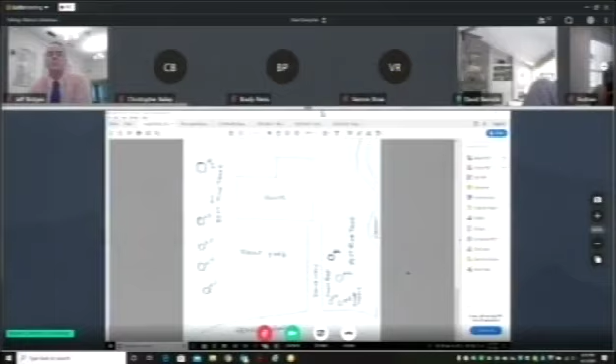So this is a, Jeff, can you share my screen, please? This is a tree removal request for 3 Glenridge Road. Once my screen gets shared, I can go over it. It's approximately... so the property has, oh, here we go. All right, so here you can see just a sketch of the property. We do have a perennial stream on the right-hand side of the property.

They are requesting the removal of 9 trees. A site visit was performed last week; Mr. Halterman and myself went out there. We reviewed the trees and asked for a certified arborist report as indicated in the application. The property owners did have a certified arborist go out and look at these trees. I received a report from him today with a summary. So just so you're aware, on the left-hand side, trees number 1 through 5, and I have some photos I can quickly show you too, are 5 tall pines.

And then on the opposite side, closer to the stream, there are 4 trees, 3 of them being tall pines and 1 being a smaller maple tree.

The arborist did indicate that upon his assessment of the 9 trees at the location, he deemed them to be hazards to public and private health and high risk for failure. The 8 eastern white pines are very tall and fragile with high potential for breakage due to heavy winds, which could cause damage to the telephone wires and poles in the vicinity, as well as to the private homes and other properties.

The 1 maple is very close to the power lines with a potential of high failure due to the excessive lean on the tree. So that's what we received.

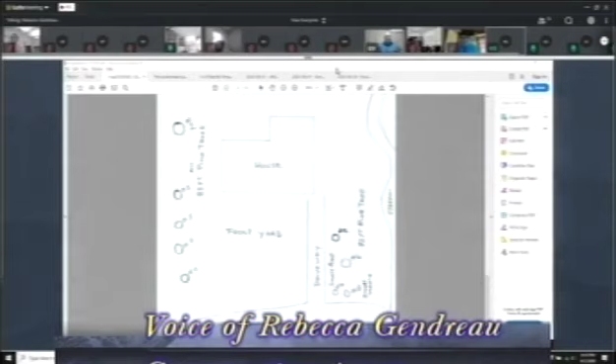I can just quickly show you the photos, and then I can let the property owners add their input here.

So what you're seeing here is the left-hand side of the property, further from the stream, the 5 tall pines here. They are marked. We did see them marked on the site, just marked lower by the base, so you can't see it here.

This is on the right-hand side. Off to the side here is the stream, and then it's the swamp, or red maple I think it is, here. And there's 3 pines in addition, 1, 2, and 3, that they're requesting to remove.

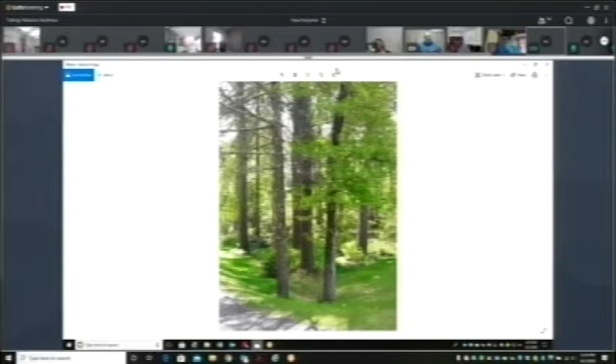Those are about 30 to 35 feet from the resource area, and the pines on the opposite side of the house are approximately 80 feet or so from there.

I would recommend allowing the approval since they did have a certified arborist look at them. There is a safety concern here. There still is a canopy near the stream, so I don't think we're going to have a significant impact with the canopy providing shade on the stream.

It probably would be useful to add some larger shrubs in that area versus requiring replacement trees. I wouldn't really recommend any replacements on the left-hand side of the house. I think the shrubs would be beneficial on the right-hand side near the stream, especially up in the front area near the road, to provide some habitat and some shade over there.

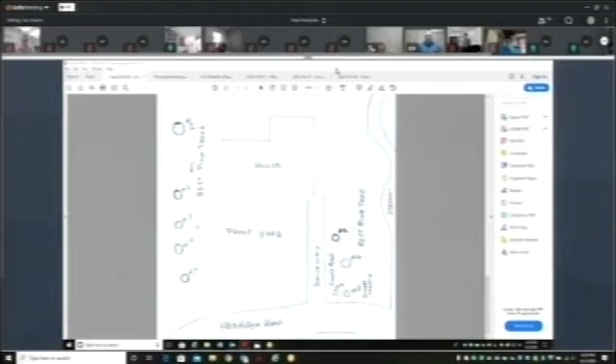39 years we've lived here. We've never seen anything like it. And I don't know how compromised these trees are now because they swung about 25 feet in the air side to side, and that one took the hit big time.

We have another one down there that has a Y. It's been cracked for 25 years, and I really didn't do anything about it because I just kept watching it. But now that we're senior citizens and these things are close to our house, there isn't a tree in this area that isn't less than 25 or 30 feet from our house. So if they fall, they're coming down on our house.

So, Joe, you mentioned your plan is to replant rhododendron? Yes. Would you consider planting some more habitat-friendly species than rhododendron?

Sure, whatever Becky suggests would be fine. Okay, there's plenty of shade there because we are leaving other trees that are there.

There's another series of pine trees there that are a little further away that we're leaving. There's a hickory tree and a butternut tree that's there, and we have 2 more pines that are shading the stream. High pines that I don't think are a threat to us because they're leaning the other way, hopefully.

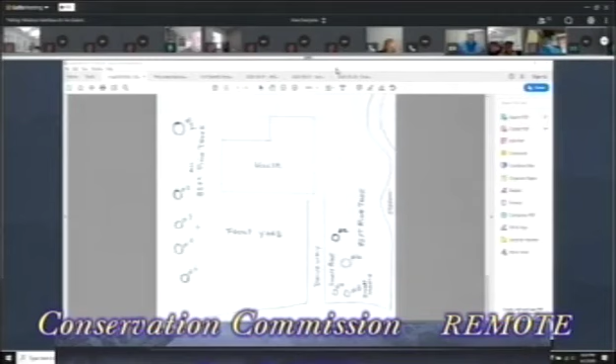All right, you're all set, Joe. Do we need a permit, or are we good? Yes, Joe, I will draft a permit for you, and we will mail and email that to you. Thank you, Rebecca. You're welcome. Are you all set? Yep. Thank you, all right. You guys have a great night. Thank you very much. You're welcome.

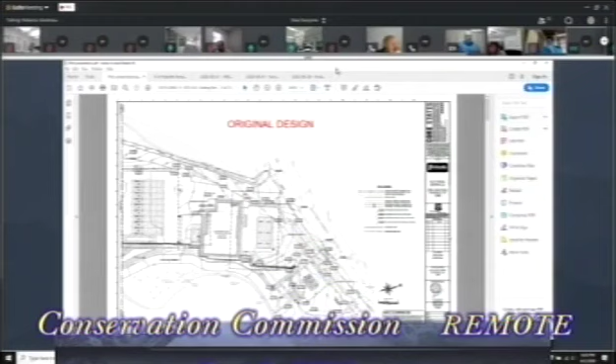Okay. So is the applicant here? All right, yep, we do have the applicant here. Just to provide a quick summary, this is a project continuation. It is accurate that we still don't have a DEP file number for this. Just to refresh your memory too, you did vote to approve having a peer review done for stormwater management on the site. Just so you're aware, that peer review is underway.

We did receive revised project plans last week for the project. They have been provided to the peer reviewer. We don't have our report yet because of the submission of the revised plans. We do anticipate having that hopefully before the next meeting, and we can work through that at that time.

So right now what we're going to do is Brad, the applicant, is on the line. He put together some PDFs just to kind of highlight where the changes in the plan submission are for you. So I'm going to let him go through this time for you, and then I have a few comments afterwards, and I'll say them afterwards.

So go ahead, Brad. Thank you, Rebecca. Is it possible for me to get control so I can use the cursor to point things out? Unless you had it on your screen and you had permission, and then you could use your cursor. I've got it up on my screen. All right, so who am I making presenter? Brad also, the one that's BA up the top. Brad? Yes. Brad Hannis or Brad also? Brad also. Okay, there you go.

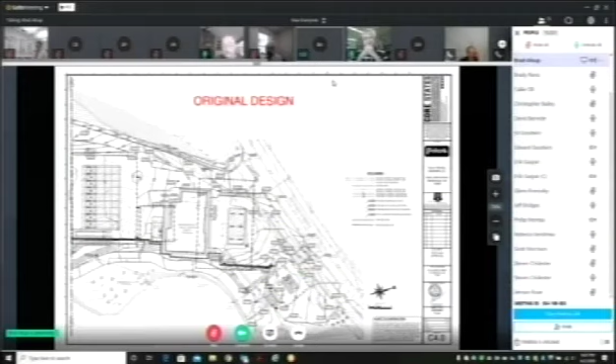Okay, all right. You guys should see what I'm looking at here. So Alan Roscoe, our civil engineer, is also on the line, and he'll jump in on some of the reasoning behind doing some of the changes. Rebecca is right, we do not have a DEP file number yet. I actually corresponded with Denise Child from DEP today.

They're behind based on workload and the difficulties of getting things done remotely in a timely manner. She did tell me they're working as quickly as possible, so hopefully before the next meeting we'll have that file number.

Based on the site visit that the peer reviewer, Alan our engineer, Rebecca, and some board members attended, we resubmitted plans to address the comments that came up at that time. We wanted to be proactive and give everybody something to review based on their comments from the site walkthrough, so that's the reason for the change in plans.

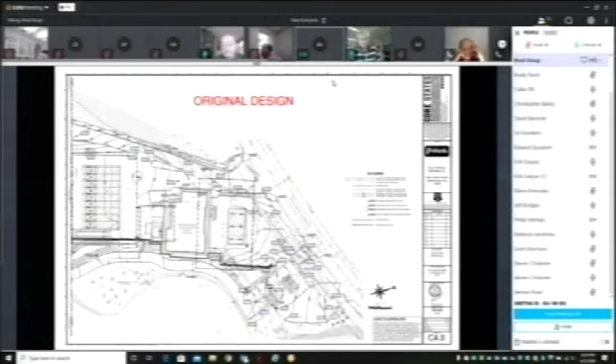What you'll see now is the original design submitted for the first hearing a couple weeks ago that the peer reviewer started with. You'll see we had a small pond here near the Ovide pond, the large one we have setbacks and buffers from. There was a small ponding area in this area, and another further south, both part of our stormwater system.

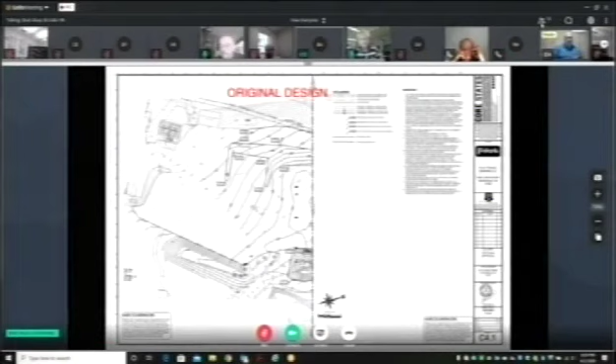Did we lose you, Brad? No, I'm just trying to get it to go back a slide. Oh, okay, all right. Let's see. What happened with the next chapter? All right guys, I apologize. It's tough, Brad, we've been doing this a couple times now, so you know. There we go, take your time.

So here's the revised design. We still have the pond here by the diesel fueling area, which was reconfigured a little but is still in place. The pond that previously filled this entire area has now been made smaller.

On the other side of the drive easement that goes back to the hotel, we've now put a pond between that driveway and the Ovide pond. Alan can chime in as needed, but the reason comes from the next slide showing our drinking water well. We knew there was a 100-foot setback from that, but DEP has come back and said it's actually a 295-foot setback for stormwater infiltration. We had a pond pretty close to that drinking water well, so we had to move that stormwater treatment area to another part of the property, and that's why it was moved to this location.

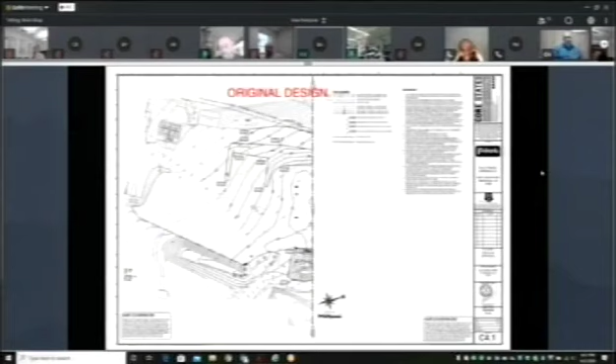Let's see, I'm only going to punch the button once. There we go. So originally, this is the pond I was talking about, this is the water well and water treatment facility. We had a pond in this area to provide some infiltration.

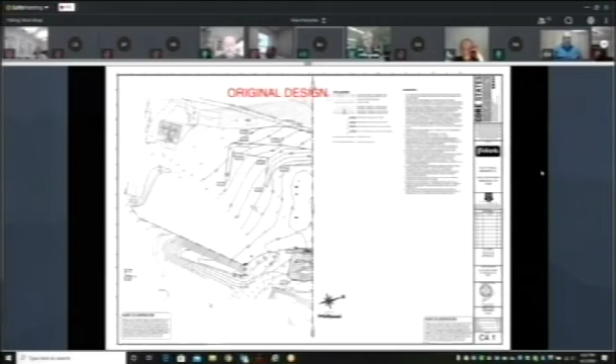This is the area that is currently asphalt that we are going to pull up. If you remember from your site visit, right along this curb line there is a row of large boulders, so we're going to put a curb there. There will have to be a break in the curb so I can still get a truck back to access the water treatment building for salt and such, but we've got a curbed area so trucks can't get back there. We're going to pull up the asphalt, and instead of a pond it will just be a grassy area that matches the existing grade, but it will be pervious surface.

So that's the big changes with the stormwater that resulted from the on-site meeting and the discussions that the peer reviewer, Rebecca, and others had with Alan.

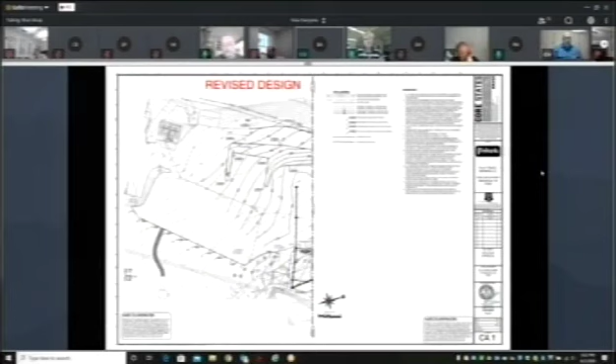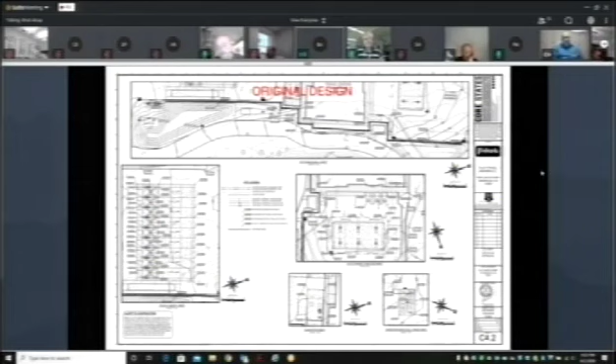These sheets are really just details of the pond that's right beside the diesel fueling area. One other change we made, probably immaterial to the conservation discussion, is we moved the diesel fueling and the truck scale about 5 feet to the west to get them further from the retaining wall, just to help from a structural standpoint.

Oh, where's my meeting though? And again, this is showing the proposed, the revised plan and those details. So the next area I'm going to discuss...

All right, the Wetlands Buffer plan. This was the original design. Alan and Rebecca, I'll defer to you on some of this. There was discussion about whether we were meeting all the buffers and whether we had everything properly delineated. So this was the original Wetland Buffer plan for the northern half of the site.

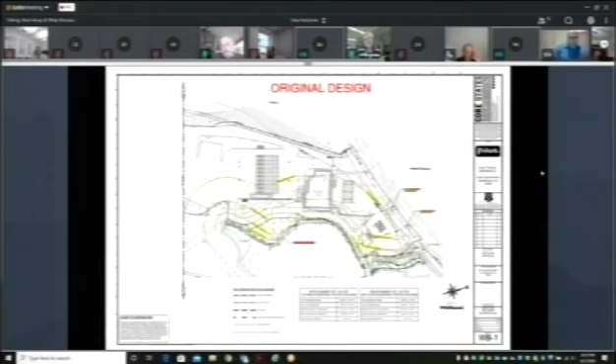The updated version doesn't have color, but it looks like it does have a couple of changes. Alan, you want to comment on that? Well, sure thing, everybody hear me okay?

The change you'll see here is in the southern area of the fire protection pond. Rebecca had noted that the southern area of this pond has riverine characteristics, so she asked if we would look at that, which we did during the site walk, to identify whether it's meeting the requirements to be riverfront.

You'll see it's almost in the figure of a box, which the cursor is going over right now. Where that area of the pond is now entering the culvert area, it does look like more of a riverine quality. So we've added the 100-foot and overall 200-foot riverfront zones to the plan and updated our tabulations.

I just want to note that there's no new areas of impact in the riverfront zone other than parts of the property already disturbed during the original development. So we're maintaining all of the setbacks between 0 to 25, with no new alterations there, even with the shifting of that stormwater basin that Brad just alluded to.

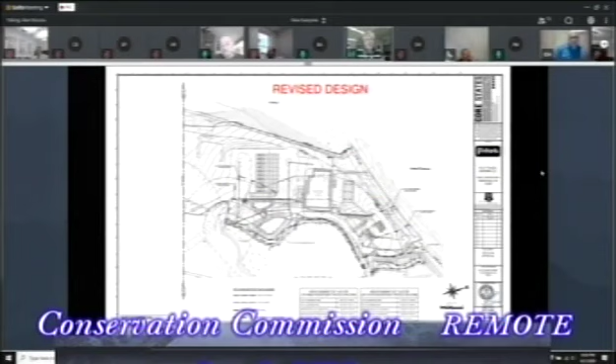Scott Morrison, who we've also invited to participate tonight, provided an order of conditions which we sent over to the Conservation Commission, relating to a cross culvert that cuts across the truck parking area on the southern part of the project site. There was some question as to whether that might be a resource area, but I think we've answered that as well.

All right, thank you, Alan.

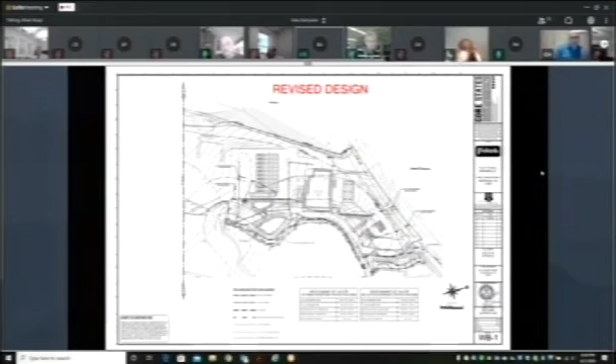The next thing I wanted to talk about is something you all brought up at the last hearing: the amount of trash that gets dumped from this parking area, the far southern part of the truck stop site. Trucks specifically back into these spaces and for whatever reason have decided it's a great place to empty out loads.

So we've had that cleaned up a couple of times. We're trying to stay on top of it. This was the original plan. When I go to this next sheet, there we go.

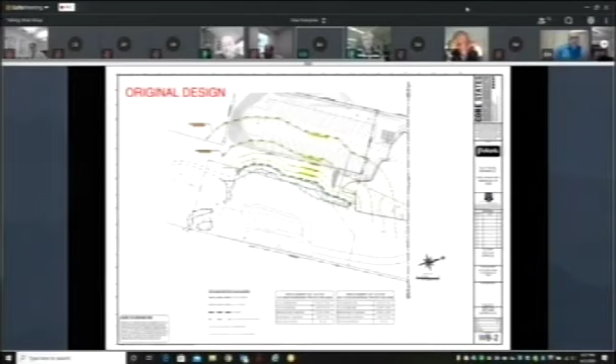It's faint, unfortunately, but we are now showing a 6-foot high chain link fence starting here, going along, and it'll cut over through this area to prevent dumping.

So we would put the 6-foot high chain link fence so the guys can't just back up. I'm still toying with how I'm going to keep them from backing into the fence. My initial thought, and don't hold me to this because I've got to make sure it's going to work, is to actually take all of the boulders that are no longer needed to protect the well.

Since we'll have a curbed area there, we'll set the boulders right in front of the curb. There will still be plenty of maneuvering room for the trucks in the parking area, but we'll have the boulders to keep the trucks off the fence and the fence to prevent dumping. I think that'll make a significant improvement to that situation.

And of course, we will make sure that necessary operation and maintenance procedures are in place to police that area and clean up anything that is thrown over the fence.

One other thing is, I had mentioned last time that we were going to relocate the leaching field for the wastewater treatment plant. These double lines you see where my cursor is, that is the new leaching field with a force main that goes to the wastewater treatment plant, approximately right here.

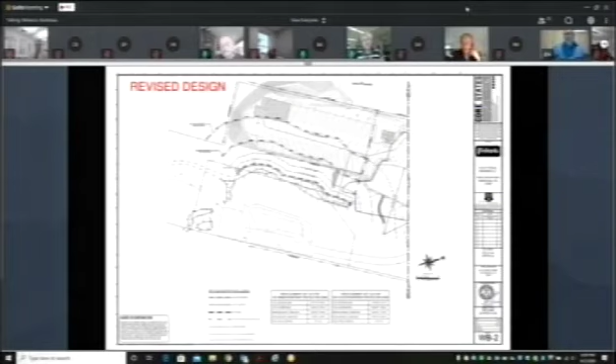You want to start? I just wanted to provide a couple comments. So I just wanted to verify about the wetland delineation. They did revise the riverfront area that I had the question about—it is shown on the plan. And then the other area that was of question is actually shown on this revised design sheet.

Oh, sorry, just took it off. Okay. I can reshare mine if you pop it right, it's still up on my screen. You pop it up, or give me control again, I'll pop it right back. I apologize, guys, you should still have control, Brad. Oh, I do? Yep, let's see. So just share your screen. Well, I'm trying to get—there we go. Screen. And this one. Sure.

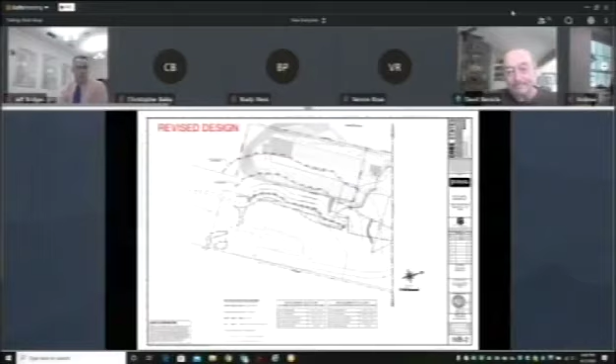There you go, perfect. Is this the one you want?

Yep. So up in the upper portion of the page, you can see there's a swale that comes down with a circle right up there.

So Scott did send a copy of those orders of conditions. I pulled that project out, and that one actually didn't have anything for this portion of the site. It was related to, I think, a dam repair replacement that was done. But we did have another file that I pulled out, another project, and it did have an overall plan that showed this area, with some information showing it's like an 8-foot riprap swale that comes down, feeds into, and shows it as a detention basin with that cross culvert that comes down.

And it does appear, I went back and looked at the aerial photos, that there's no resource areas up there, so it appears that it's just stormwater from Route 84. I think there's also an easement for the Commonwealth there. So I don't see any concerns with that. It does appear to be a stormwater system. So I think we're all set with the revised delineation as shown on the revised set of plans.

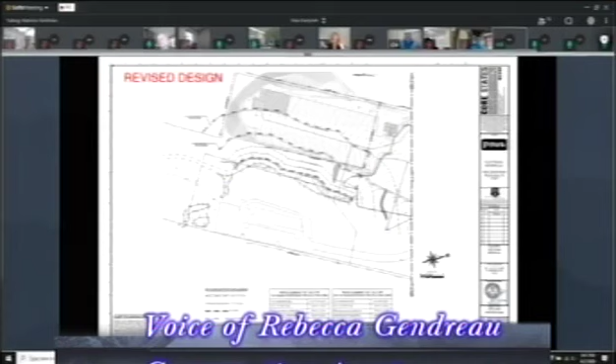I guess my other comments would have been about the fence, so I'm glad to see that you included the fence on there. I just can't tell from here if it extends all the way to the end of the parking, because I think that was the biggest area of concern. Yeah, kind of just where your cursor is, those last ones - if it just makes sure the fence goes all the way to the end, that was kind of the bad section, I thought. That would be useful. So thank you for adding that in there.

The one other thing that we talked about was the potential inclusion of a gate to prohibit people from driving over the dam. I didn't know if you guys had a chance to look into that, any options for those breakthrough gates or some type of lock that's shared with the fire department. I know we have kind of both things in town on some different sites. I thought having something there would be really useful, and maybe things will change in the future, but it does appear that there is some traffic going over there, and there's no protection if someone drove off the dam right there, and having a vehicle end up in that resource area could be a big impact. So I thought if there's some way to maybe add a gate or something that could prevent people from crossing, that would be a good inclusion and beneficial for the resource area.

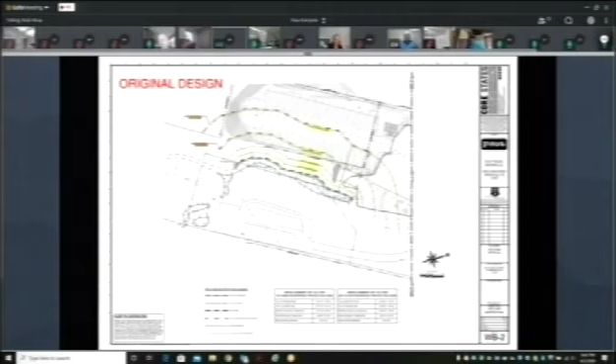Yeah, Rebecca, we will certainly take a look at that. There's got to be a solution. I don't want to commit to a specific solution - I would like to just keep working with you to come up with something that's acceptable to you, to the fire department, and to Jean and her group to make sure that it works. But I have no problem doing something to block that off in a safe manner. What I'm looking at right now is probably something in the area where my cursor is. We'll just have to figure out the best way of doing that so that we don't impact the pond as we're installing it, but we also provide what's needed. So I have no problem with that.

Thank you. I don't have any other comments.

Anybody? David? I only have one question for the applicant. With the newly revised plan, is there any reduction in the amount of pervious surface that was gained during the previously issued plan?

No, we should not be losing any of the pervious surface that we gained. Alan, was there any increase or did it stay the same? Thank you. I know it did stay the same the way we had proposed it originally.

So the only real change was fitting a drainage basin into an area that was already having pavement removed. The easement roadway that goes back to the hotel - we were proposing to remove the parking spaces alongside that driveway. And that would be right in this area. That's correct.

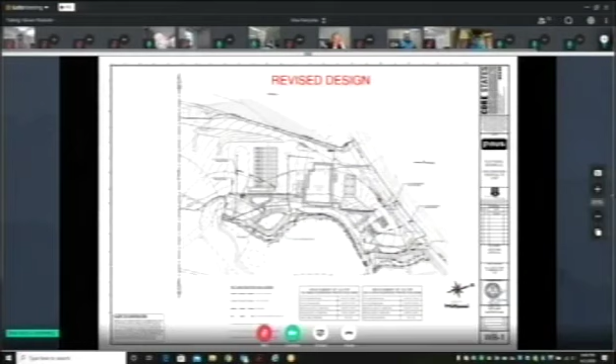Continuation, did you vote for it, David? That's what I was going to ask. David Barnacle, in favor? In favor. Stephen? Stephen Chittister, in favor. Ed Goodwin, in favor. Eric? Eric Gaspar, in favor.

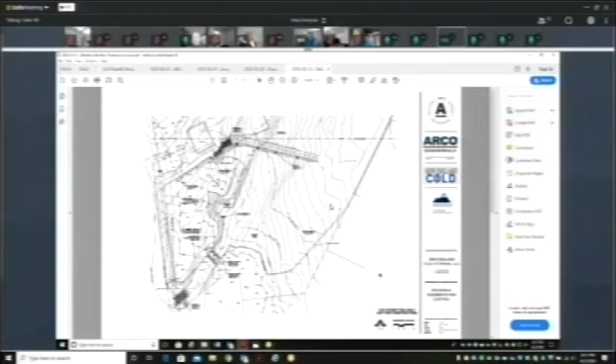So after that site inspection, I reached out to the engineers and the clients and said we overlooked that this thing was within 25 feet, leading off of the asphalt as we walked out of the woods the other day at number 8. So I had them move it enough to get it out of the 25-foot no disturbance zone, and that was the change on the access way.

We do need more time for you to review this, and we expect you'll have that time because we don't have a DEP file number for number 6. So we would be asking for a continuance on number 6, but we could still discuss it because you do have those materials. In that next two weeks, or whenever your next meeting is, you could look at the RDA where we moved the access way on the temporary outside of the 25.

That being said, the clients also, I asked that they put together a reasoning why they would want to use this temporary access to get into the site, as they explain in one of the letters Rebecca now has from Mr. Panis out of Atlanta, the builders. They explained that it's going to take a couple of months to build the permanent access.

This is another project though. I don't want to get into number 6 totally because we're on number 8. So here the RDA, there is some ramifications. Who's on first? It's 8 first, RDA 6 is second, 15 minutes later for the NOI.

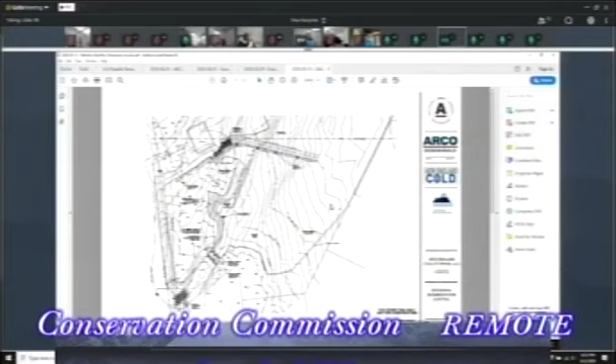Once we receive an order, we would go in with the temporary access, start building the permanent access in from Picker Road, build both sides, build the footings, then crane in finally the bridge. But in that two-month time lag, we would have the opportunity, and Rebecca has this for your review.

I don't want to go too deep into it because I do want all the board members to review why we're asking for the temporary access. So I'll just say we do understand there'll be a continuance, and if possible, I'm going to be asking for a continuance, and I'll follow up with paperwork also on this number 8-6, or RDA, to give you plenty of time to review the engineer's discussion and the developer's discussion about getting the site underway. So I'll leave it at that on the temporary access, only receiving, as you said, the paperwork today.

Okay, so you're asking for a continuation on 6 and 8 Picker Road? The RDA. I would still like to talk for the 15 minutes you might give us, or 10 minutes. The engineers are online, the owner's online, our builders from Atlanta, Arco is their name. In case they have anything else to say about the site at number 6, I would hope that we could at least open that up, do a discussion, and then continue that one after.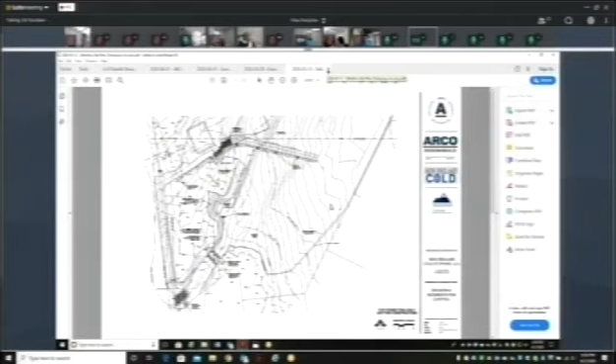We have a notice of intent, DEP file number 300 TBD, New England Cold Storage LLC, applicant Glenn Kravosky, EBT and Environmental Consultant, representative for the construction of wetland crossing and a commercial site infrastructure. You're on, thank you sir.

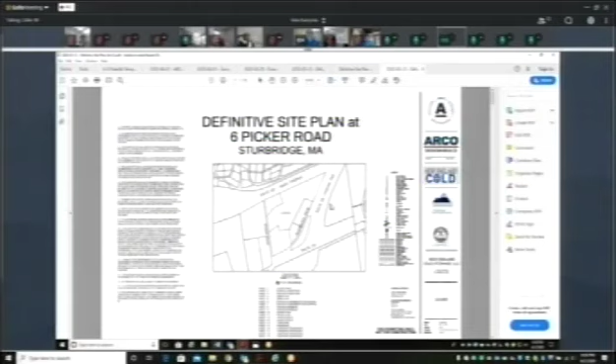Thank you, Rebecca. As far as the bank delineation anywhere else on the property, if we look at the site, all other areas, the wetland is considerably wider. And as the regulations call for avoid, minimize, and mitigate as the premise, this would be the only, the narrowest, clearly by far, location to cross and gain access into the site.

That's why the bank was only flagged at that minimum 3 to 4 foot wide bank, and this highly intermittent stream, which starts just on the property above us, was delineated at the location where we're crossing, so that we could understand and do stream crossing standards with a 90% openness ratio, which I did ask the engineers to submit, and they did. So there would be no other logical location to access, through thousands of square feet of wetland or bridging those wetland square footages, where here it is the narrowest point.

This parcel has been in this form since pre-2004. Mr. Prouty bought the site originally as an industrial park, Prouty Glickman, and then they continued on with selling other pieces, and it's stuck around for the last, we have 16, 20, 24 years. So I'm not sure what the use of flagging the other bank would be, but I'll leave that subject since you brought it up. I had to say something about it.

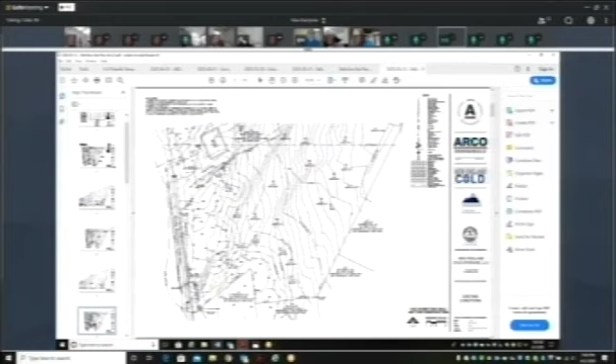And we did cite policy 88-2, which is the policy for limited access crossings. Ms. Gendreau did ask at the end of the site inspection to justify whether a parcel on Technology Park was sold off that might have allowed for upland access to this 18, 18 and a half acres. We did find, Ms. Gendreau, to answer your question, it was sold off in 2004.

That would be the building on Technology Park Road between the mini storage and the gas company. That small brick building in between was sold off. Burton Engineering did the engineering aspect of it, and there was a question as to whether that would have allowed us to have upland access without crossing wetlands.

And for that reason, we bridged the full span, so we weren't filling any wetlands, because we recognize there was a sale of property under 88-2. In that sale, it references, and I have it as Exhibit 11, and it states that particularly where the applicant has had notice, as described in number 3, it is also recommended, where appropriate, to include a special permanent condition advising the applicant and anyone performing a title search on the property that any future project to cross wetlands to gain access to certain portions of the property will not be qualified as a limited project roadway under 310 CMR 10.53(3).

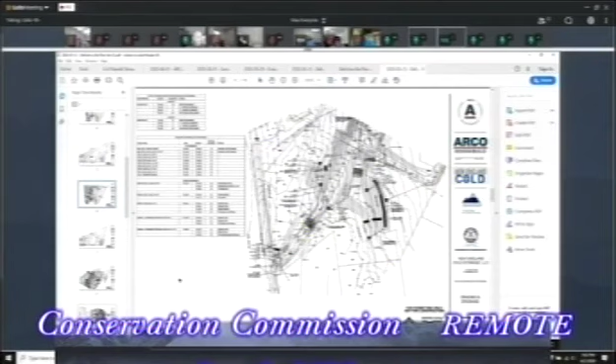Yeah, he has a lawyer, but it also says to the Conservation Commission in this policy that the commission gave warning to the applicant. So this isn't just the lawyers or the attorney, it also says we gave warning. You didn't give him warning, but that's okay. I understand that you would take that stance, but it is in the policy that you give that warning, particularly when you gave him warning.

We regret that Burton Engineering, probably Mike Loyne, had not understood these points and that this thing went forward in '04. That being said, the project, as I wrote up in the project description, what I hope you would read...

This is applicable under 1054, 1055, 1056, and 1057. Flooding is not there, as Rebecca said, no rare species under 1059. So we wrote in the project description that this is applicable as we're not exceeding any performance standards under 54, 55, or 56, being the bank, land under water body, or bordering vegetated wetlands. In fact, we're not filling any permanent wetlands, and we're at 200, I believe, square feet.

It's in your notice of intent, Mr. Goodwin, Mr. Barnacle. It states, in fact it's in the project description also, that the temporary disturbance, 250 square feet of temporary disturbance, is to dig the footings for... Well, we haven't got it in front of us. You just delivered it today, right? No, no, we've had these plans. Oh yeah, we've had this. Okay, all right, yeah, this is all there, Mr. Chairman.

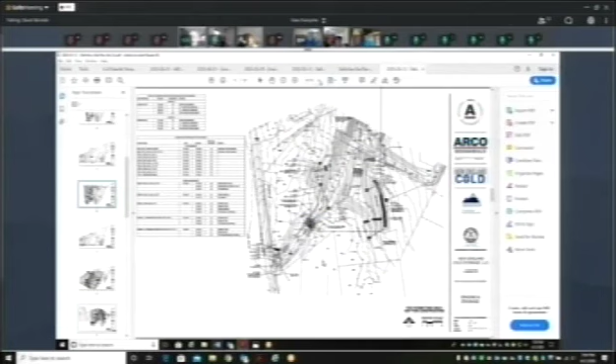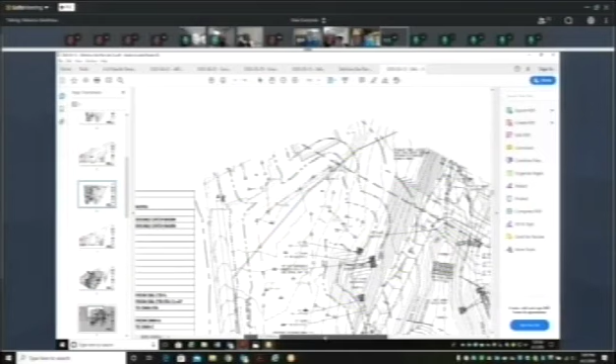Hold on for one second, please. Sure. Becky, would it be possible for you to blow up the actual part of it, not the left side or the right side with the advertising? Because it's very, very restricted. Is that better? Even that's better. Yes, thank you, I mean I can zoom in more. Yeah, do it more. Yes, excuse me. It's just I can't see it the way you guys can see it, so just let me know. Well, we haven't been able to see it at all, so now it's good. Bring it right there. There you go. Thank you. All right, thank you.

Thank you. I'll walk through some of the things. You'll see a gray hatched area in the middle of the road, now in the middle left — that's the crossing area we're talking about. The buffer zone shown, the phantom line with two long dashes, is your 25-foot local buffer zone. The next one out, a little heavier with a smaller phantom line, is the 50-foot buffer zone. The single center line is a 100-foot buffer zone, and the subsequent 200-foot is out beyond that, shown as another heavier center line type on the plan.

So that access road, like I was talking about, is 30 feet wide up to the first intersection of the road, at the top of that sheet. Then the paving narrows down to allow one-way traffic for the heavy truck traffic around the building, to try to reduce the amount of paving and keep the paving areas smaller.

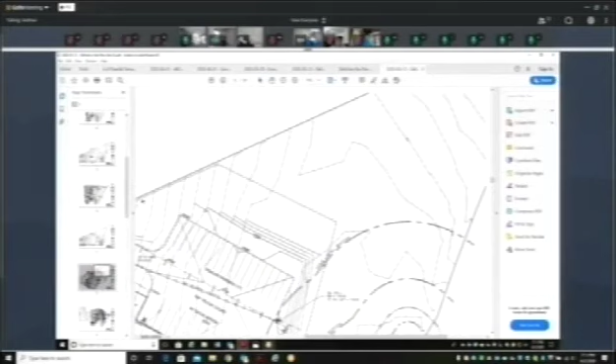So she just transitioned to the second page. Is that okay for you? That looks pretty good, Becky. That's good, Beck, yeah.

So the perimeter access road wraps around the building and goes to the back of the truck area. Like I said, this is a freezer building, for frozen warehouse storage where trucking can bring it in or out, and Brady or Mr. Bailey can discuss the line of business more than I could. On the left-hand side of the building is parking — there's 39 stalls, standard stalls for the town of Sturbridge, to allow for employees, office use, which is a very small area, and mechanical equipment use.

Truck storage is up on the top of the hill. One of the challenges on this site is being able to manage the grading and try to keep the site as balanced as possible, utilizing on-site materials, minimizing the amount of trucking in and out during construction. So the road progresses uphill almost all the way to the back line, near where it says MHE storage and proposed building. That's about the high point of the site.

That MHE is for material handling equipment storage inside, at a dock that's actually at grade. And then it proceeds to go back downhill to allow for truck dock parking at the loading dock, where it says cold dock storage.

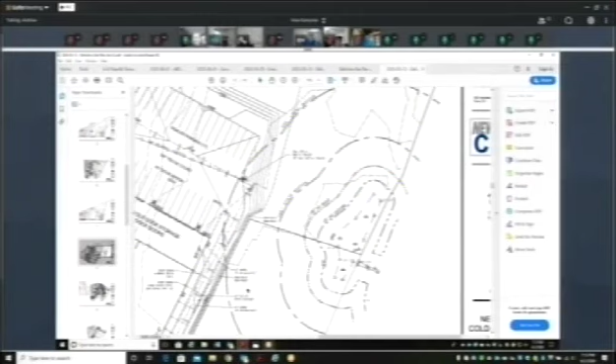There is another wetland, on the easterly or northeasterly side of CubeSmart, and you can see those buffer zones there. The only work that would be within your jurisdiction would be within a 200-foot local zone. We're able to keep the rest of the work outside of that area. And on the upper right-hand side of that plan, that does abut Podunk Pike. It's a no-access portion of Route 49, so the ability to get into the site from that side is limited.

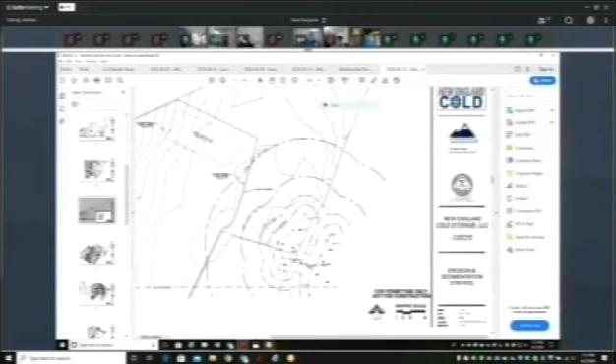So drainage-wise, just going to minimize it a little bit here, so we can point out the drainage easier for you.

So right there, Becky, soil types are predominantly type C. We had borings and on-site testing done by a geotechnical engineering firm, and soil testing confirmed type C glacial till, not unexpected at this particular site.

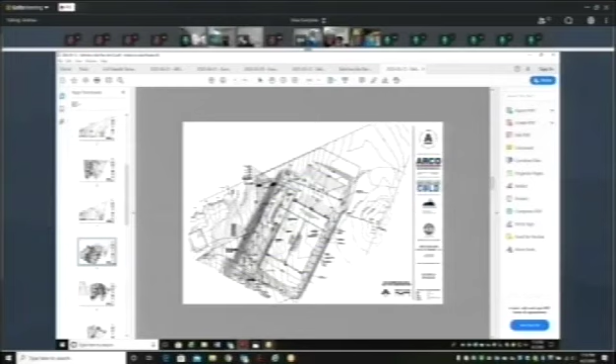To manage the water, the whole site sheets from basically the left-hand side of the page predominantly to the right, and the right-hand side predominantly to the left, down towards the metallurgical building. We divided the site a little for the upper basin, that small triangle shape behind metallurgical and adjacent to the pike. We'll be able to manage only roof water under this design.

The rest of the site, we have it going through a series of treatment train processes. So there's a low spot on the eastern side of the truck dock that flows around and down the access way, picking up surface water from the paved and surface areas, to go into the drainage basin labeled Drainage Basin A.

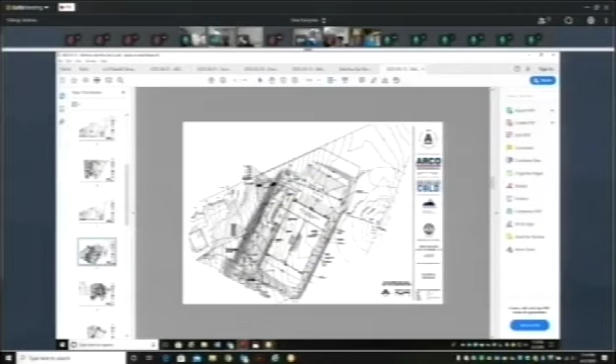I'm going to change sheets now. That would probably be best, yeah. Must be a lowercase a. We could put that in where there. Where does that drainage basin dump into?

So let me continue. There is a direct recharge basin up to the right of Drainage Basin A. You can see that stone hatch, if you will. That's direct recharge for roof drain coming off the eastern side of the building, so we wouldn't have to take up the basin area for direct recharge.

The rest of the water coming off the parking area goes into a forebay for stormwater treatment and then into the infiltration basin. That basin, if you came up the access road, will actually be higher than the road itself.

And then there's an outfall out of Drainage Basin A, the larger one on the right, that comes down and discharges on the right-hand side of the access road. Right, yep, right there by your corner.

There's a low spot, as we described with the road, also just to the left of that pointer, Becky. There are 2 catch basins and a Stormceptor, a proprietary device, proposed because Drainage Basin B, the smaller oval-shaped one, doesn't have enough real estate in that area while maintaining the 25-foot no-disturb zone to put in a forebay for treatment.

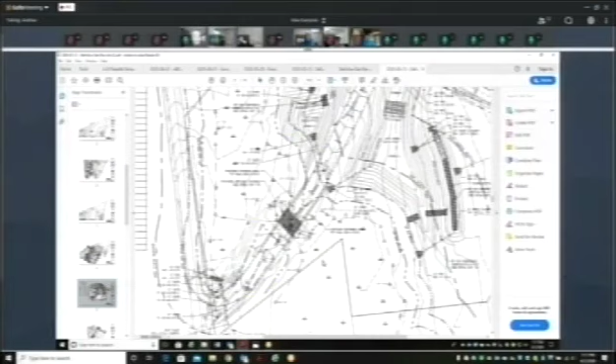Again, I think I mentioned water and sewer for the site. There's going to be a fire protection line and a domestic water line that services the facility. At the top of the hill, there will be a bladder tank and a fire protection system due to the existing water pressure at the top of the hill.

Sewer will be through a gravity line down near the bridge and then go to an E/One grinder pump system for low pressure sewer. There is no gravity connection available on Picker Road, so it would have to be pumped up to the intersection of Picker Road and Industrial Park.

The town, or F.W. Webb, had put in a manhole with a spare line that we'll be connecting to, right around the opposite side of that driveway. Somewhere in there, can't see exactly where, Becky, but there's a driveway, and that's where that sewer line will connect up.

All surfaces will be paved. I know there was a comment about adding some additional plantings for the berm for Basin A, adjacent to the 50-foot buffer zone, which we'll revise the plans accordingly.

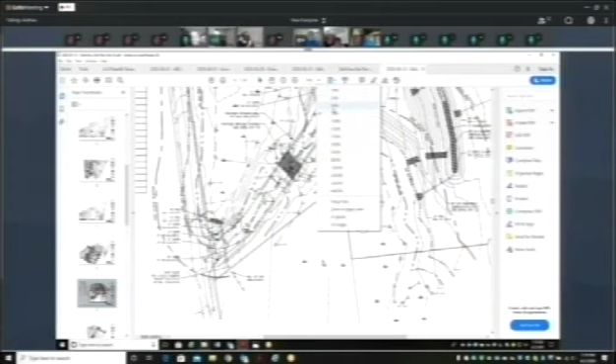I don't know if there's any other questions. That's a good overview of the site, I think.

If the committee's amenable to it, you can hold your questions. We've got to continue it anyway, so we'll get a chance to take a look at it. If anything jumps out at you, though, you probably should say it. But I have just one quick question.

You mentioned a number of places where you're putting Stormceptors. Are any of them going to have oil water separators, considering it's mostly going to be truck traffic entering and departing from that facility? Your primary treatment is going to be through the catch basin, which is kind of a first phase oil and water separator. I'll have to look back to see what Stormceptor says about the oil water separation for that model, the 450i. That was what I was considering, yes.

All right, any other questions? Might I say one more thing? Unless somebody muted me. If you unmute me - who's speaking? You can move. I think I'm on the phone anyway.

The only other thing to say is that we also proposed planting on the opposite basin, as you're going in on the right, on those slopes facing the wetlands. There was some discussion of the reason for that basin. It is over 50 feet from the resource area, but we felt that bush and mast crop would serve well on that basin rim facing the wetland also. So you're going to see a little revision there, and we're not using trees, but it will be dense with berry crop bushes, native species.

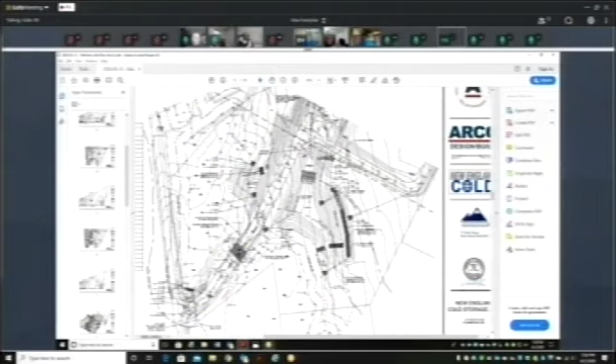All right, now we are at 7 o'clock, 130 and 140 Fisk Hill Road, request for determination of applicability, and it's continued from May. Goulas G. Allsworth LLC, represented by Glenn Krevosky of EBT Environmental Consultants.

Glenn, you're on again. Thank you, Mr. Goodwin. I do know that as I was running back from North Reading that I did not make your last meeting, but I heard from one of my clients that there was a discussion not to continue this any longer.

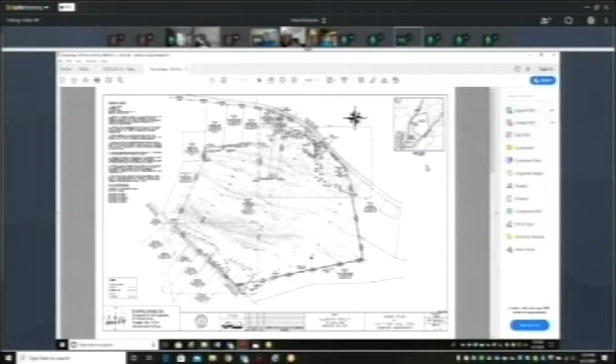We were waiting. There was a beaver problem over the winter time. It did bring the pond up. We had discussed with Ms. Gendreau the delineation of the edge of the pond to see where the 100-foot buffer would come in, or 100-foot buffer to the top of bank, and where the 200 would be. That plan was sent into the commission today, again at the last minute, but the beaver problem had just been solved. The water is still outflowing from it, but the original farmer's channel is flowing out at the elevation the farmer had dug when he drained this thing some colonial time ago.

So I was able to flag 41 top of bank flags this weekend. The surveyors picked the flags up yesterday and plotted it today. This plan is not exactly what I was looking for from the engineers, and it's not your full 7-day review time, we understand. But we did this because we finally had the opportunity to get at least the top of bank so we could discuss the potential for CRs of this 62-acre site.

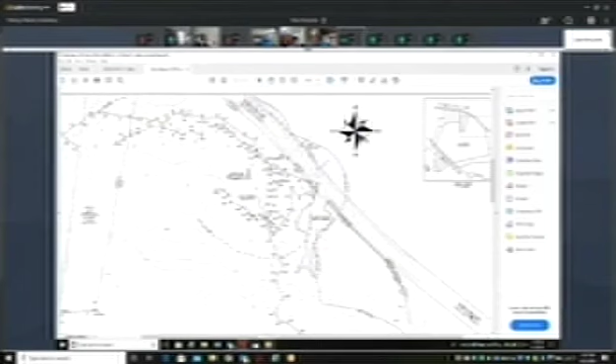All right, and I'm not sure if we have anyone on the line. We have a couple of old business items. We have 30 River Road and 118 Lead Mine. Phil's on the line, hold on, let me turn it back on. 30 River Road.

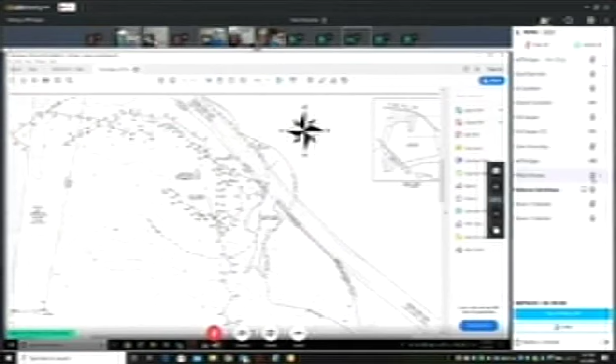Okay, Phil's mic is on. Beck, yeah, there you go. I don't have anything else to share at this time, so if you want to take my screen off, you can do that, Jeff. What? Oh, you want me to take presenter back? You can stop sharing my screen.

Okay, there you go. Okay, so we'll do this, this is old business. It's DEP file number 300-1021, 30 River Road. This is for an update on an enforcement order that we had issued and potential review of third-party proposals.

So just to get started, we do have the project proponent on the phone. Just to let you know what I've been working on since our last meeting and discussion on May 5th for this - I've sent out proposal requests for the wetland impact that was outlined in the enforcement order. I did have a deadline for last Friday, and I did receive some proposals. However, I'm waiting for revisions to the scope of services, so that way it fully encompasses what we're looking for.

So due to that reason, I would recommend that we continue the review of the proposals to the next meeting to provide time for the revision. A couple of the proposals only included visual surveys, so we asked for that change on that.